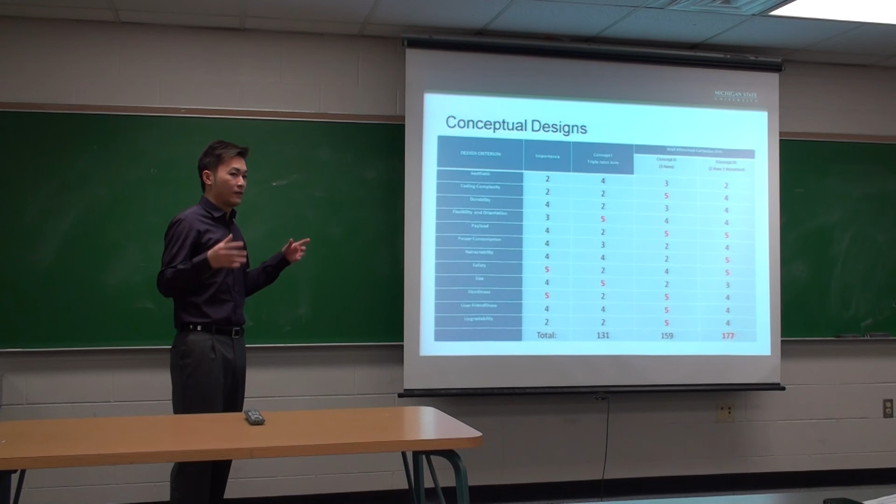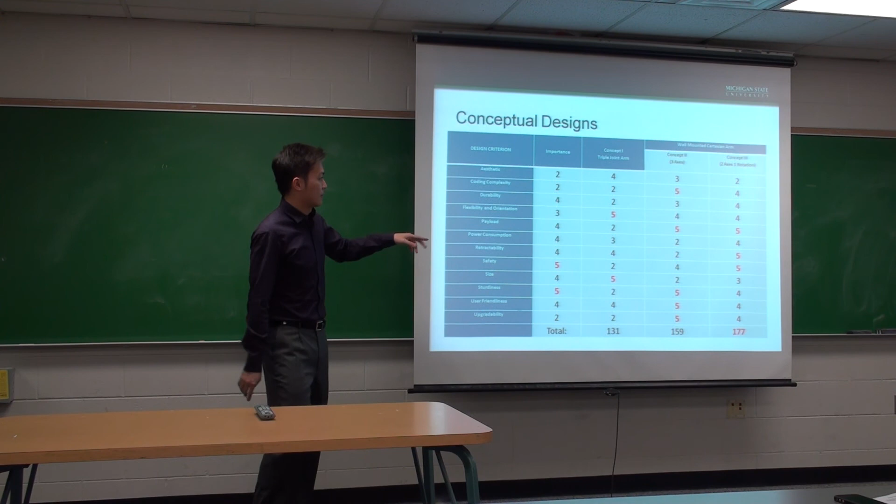Okay, I'm Kake, and I'm going to talk about the 3 conceptual designs that we came up with. There were actually other ones, but the 3 main ones are detailed here. This is the feasibility rankings graph, so we listed a lot of the stuff he said, including aesthetics. And we realized that the first concept, the triple joint, is not as good because it just doesn't rank as much.

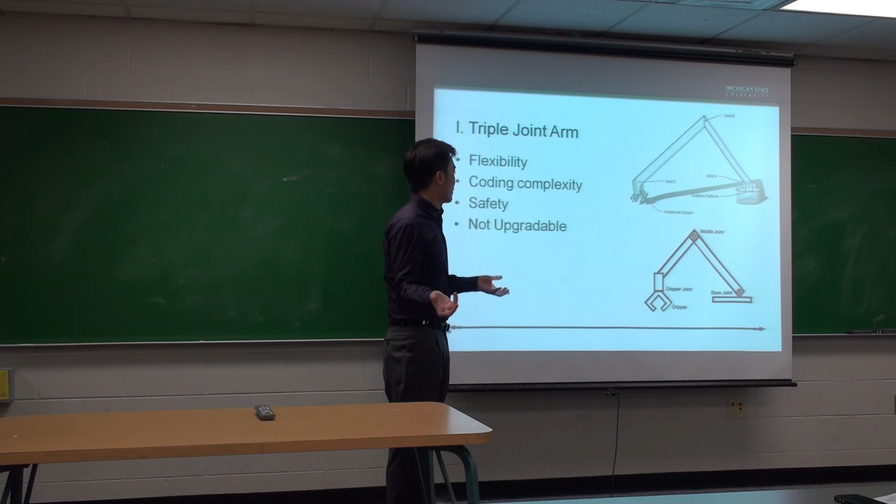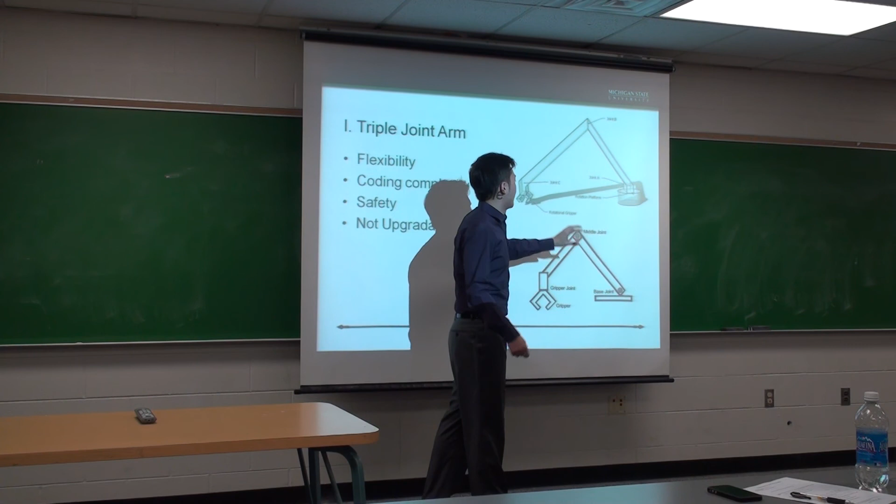This is the first one that we talked about. You can see this looks very much like the commercial products that you can buy. The problem with this concept is we have to program it to move in directions where each of these joints will have a motor, and they basically have to share the loads they're going to move. Because of that, the motors themselves will have to be very strong, and that is one problem. And even though it's flexible, compared to Cartesian, which is just going X, Y, and Z, this will be more complex to code.

Because of that, it's harder to code and it's harder to upgrade. One of our customer needs was that the product has to be able to be upgraded by future engineers, so this was not our favorite pick. Also, this setup is not very safe because we would have to put it on the wheelchair Doug is using, and to lift a really heavy load, the base right here would have to be really heavy, or it has to be bolted on the wheelchair.

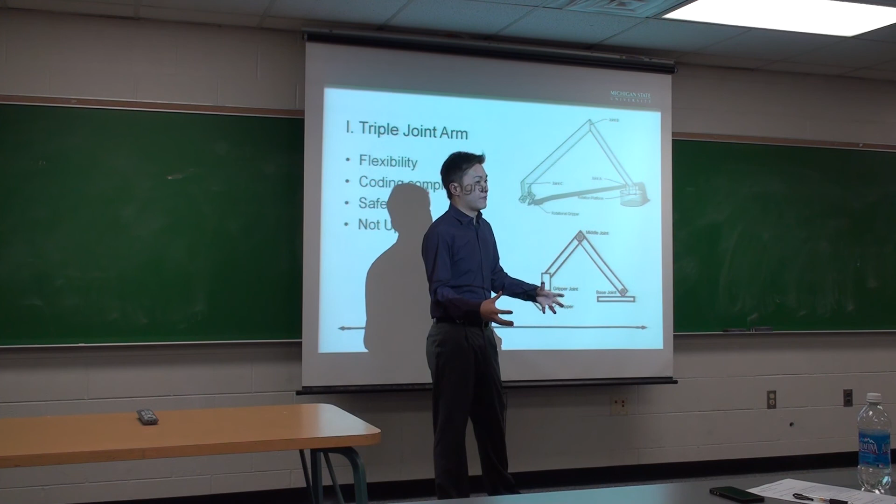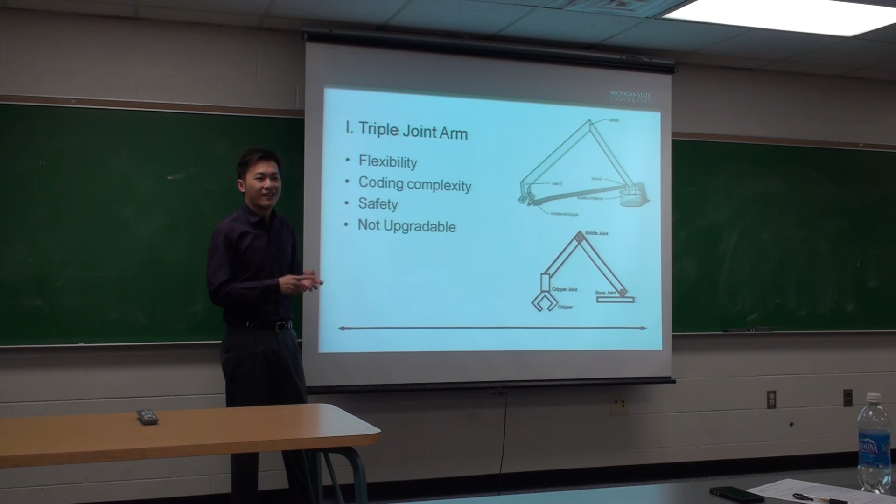But that is not a very good idea, because if it somehow breaks, everything is just going to fall off, and it's too dangerous. Because one of Doug's needs was to cook pasta, and there will be a pot of boiling water, and we don't want that to happen.

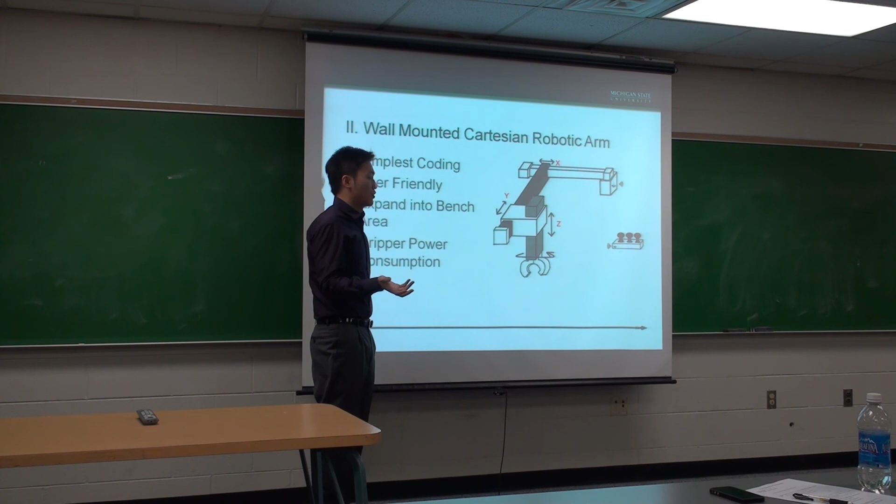But we're not going to use Bluetooth wirelessly. We're using XBee, which is part of the Arduino radio wireless. And so this was good at the point when we picked this, but there was one problem: this Y arm extends right into the kitchen bench. So it's very difficult for it to move around, or even to retract the whole thing when Doug is not using it, or someone else wants to use the kitchen bench. So we decided that that is one problem, and we wanted to solve it.

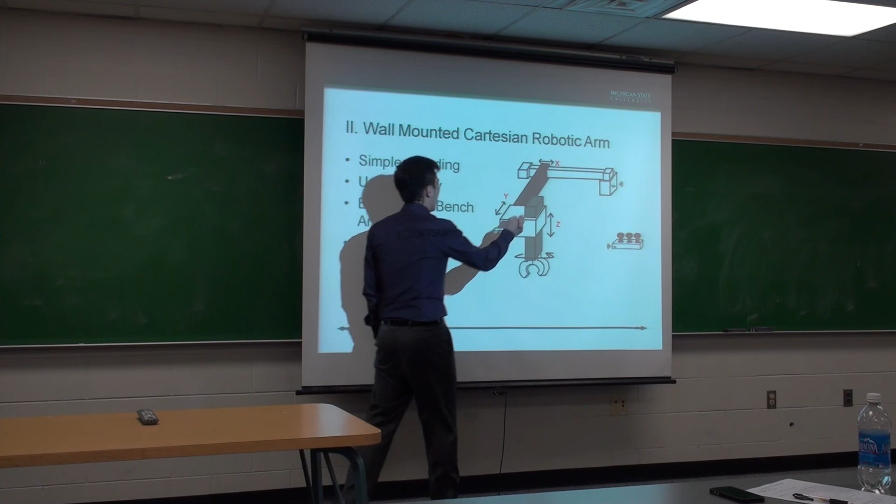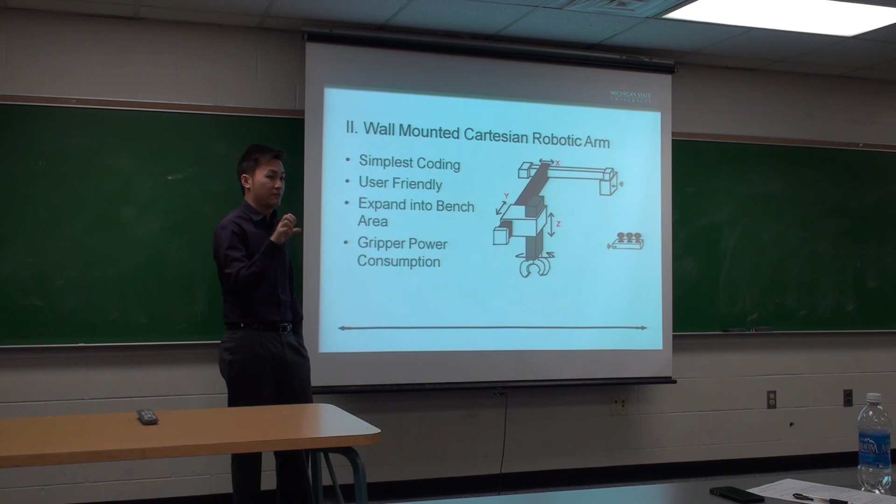And the motors here and here are going to have to be strong as well to lift the whole grip, and the gripper has to have a very strong motor to twist when it's carrying some heavy pots or anything that's heavy.